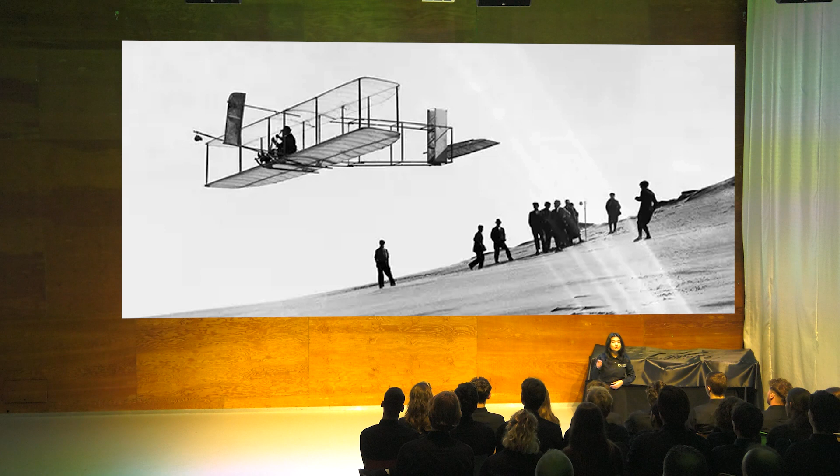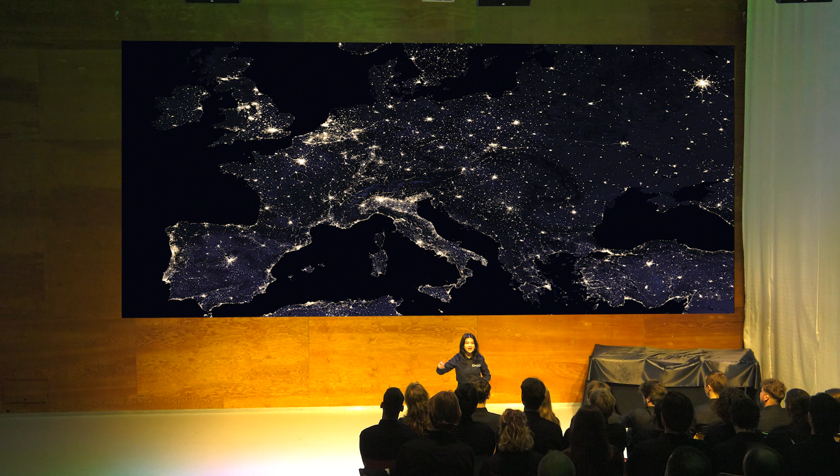Traveling by airplane connected people and cultures across the globe. And today, air travel is the most commonly used mode of transportation for long-distance traveling. Back then, these ideas might have seemed crazy or even impossible because they challenged the world that people were used to. But it was these unconventional and radical innovations that made it possible for us to connect the world, to bring distant cultures together, and to expose us to new ideas and new understandings. Every technological innovation powered a next great leap and shaped the society that we know today. Because after many decades, we still use these modes of transportation.

Let me take you on a journey of what traveling looks like today. So recently, I've been looking into going on a nice city trip in Europe for the summer. Just a short and relaxing breakaway after a year long of hard work at Delft Hyperloop. And I thought about going to Milan, one of the most beautiful cities in Europe. And I was facing a dilemma. It is a dilemma you may recognize. We want to travel, explore, and connect, and we want to do this in a fast and comfortable way. But with climate change being one of the biggest challenges that we as humankind have faced yet, we want to do this in a sustainable way.

And traveling by train is the most environmentally friendly for my trip to Milan. But door to door, this will take me around 16 hours and 4 to 5 transfers on the way. That doesn't really tick the fast and comfortable box. So I started looking into flying. And this would only take me 1 hour and 40 minutes. Seems attractive, right? But with all the time that I will need to go to the airport, wait for my flight to take off, and then go from the airport of Milan to the city center, this trip would still take me around 5 hours. And then, I haven't even mentioned the amount of energy that this flight would consume, which is more than 13 times as much as traveling by train.

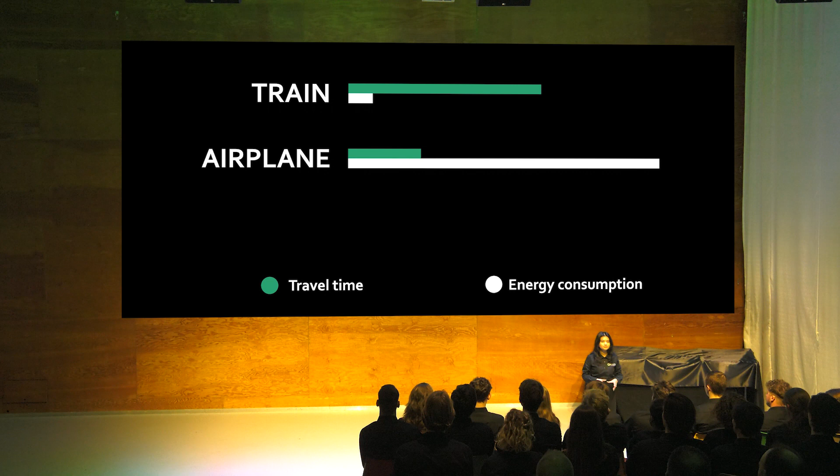Quite a dilemma. There seems to be no ideal way for us to travel. So, once again, we've come to a point where we're asking ourselves a question. And it's that same age-old question that people have been asking themselves for centuries. But with the transportation sector being one of the biggest contributors to climate change, we've added a new challenge to the equation. The question we're asking ourselves now is, how can we travel a longer distance in a shorter amount of time in a sustainable way?

We at Delft Hyperloop have the solution for you. And just like the train, the boat, and the airplane, this idea may sound unconventional, radical, or even crazy. Because yet again, we are challenging the world that you are used to today. But with the current challenges that we as a society are facing, we now, more than ever, need to explore these ideas that might seem unconventional, radical, or even crazy. And Hyperloop is such an idea.

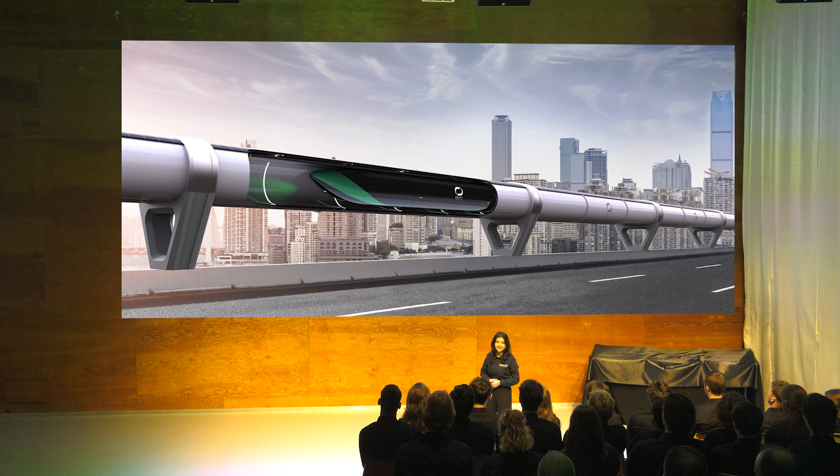It is a solution, a new mode of transportation that can reach speeds of 1,000 kilometers an hour in a highly energy efficient way. But how does it work? And why is it so hard for the current modes of transportation to reach such high speeds? First of all, this has to do with air drag. Air drag increases not only linearly, but quadratically, meaning that if you want to double the speed of a current mode of transportation, such as a car, you will need 4 times as much energy.

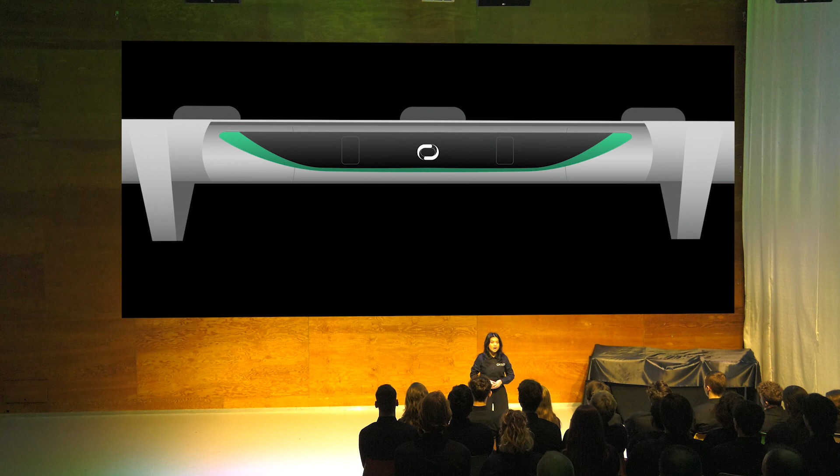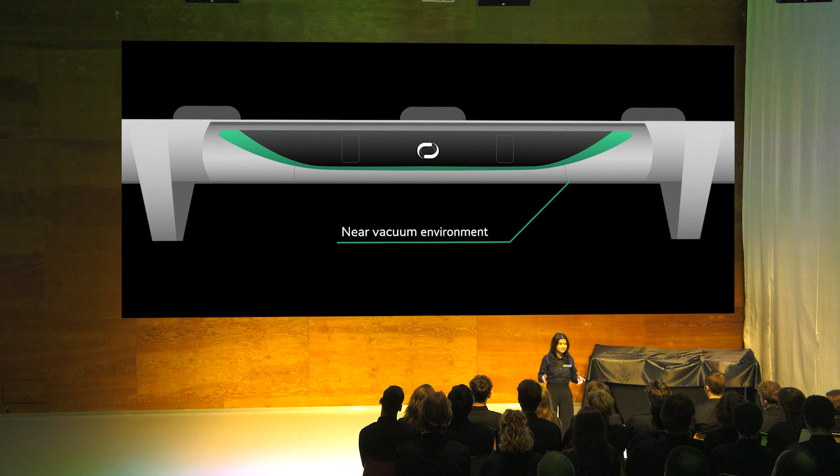What a Hyperloop does is it limits this factor by moving the pod, we call the vehicle a pod, through a tube in which there is a near vacuum environment. This makes the pod encounter very little air drag. The second major limiting factor that the current modes of transportation encounter is rolling resistance. And rolling resistance also increases with speed, making, for example, the wheels of a current mode of transportation very inefficient at higher speeds.

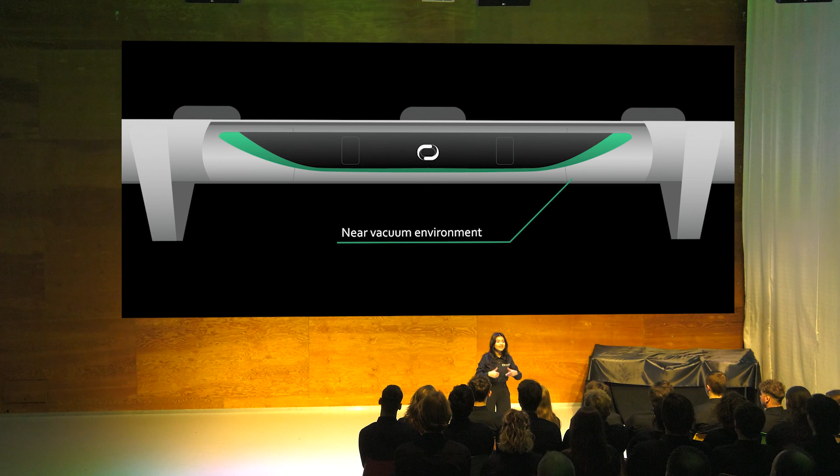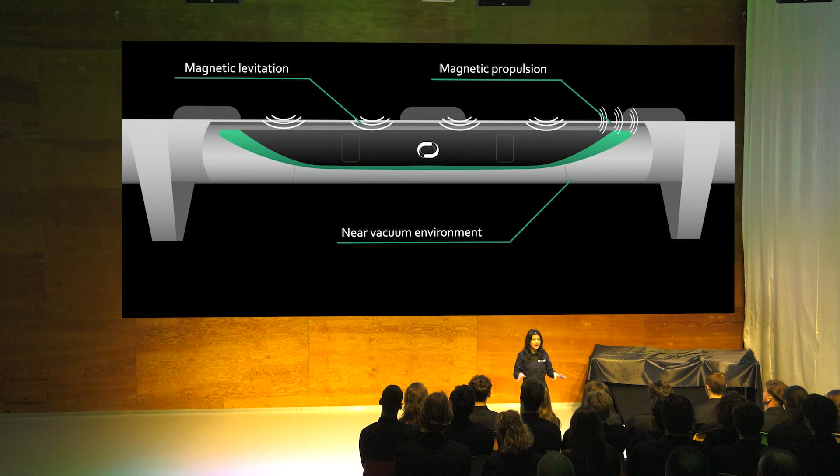Hyperloop eliminates this problem by using electromagnetic forces to levitate the pod, making it not touch the tube at all. To move forward, a Hyperloop also makes use of magnets, which provide a contactless magnetic propulsion. By limiting the drag and friction, a Hyperloop can reach speeds that come close to the speed of sound, using only very little energy. Every couple of minutes, a Hyperloop pod will move from one heart of a city to another, providing a solution to long and uncomfortable travel hours and enabling the energy transition. This completely revolutionizes mobility as we know it today.

So let's put this new mode of transportation into perspective and see how traveling with a Hyperloop would work out for my journey to Milan. First, we go to a centrally located Hyperloop station, say here at Rotterdam Central. There, we board a Hyperloop to Milan, and in less than 1 hour, we arrive at station Milano Centrale, right in the city center of Milan. A journey that is around 3 times as fast as the current journey with the current fastest mode of transportation, and uses about the same energy as a train.

Instead of making concessions between speed or energy consumption, a Hyperloop provides us with a solution. It allows us to travel, explore, and be more connected than ever. And it makes all of this possible in a fast, comfortable, and sustainable way.

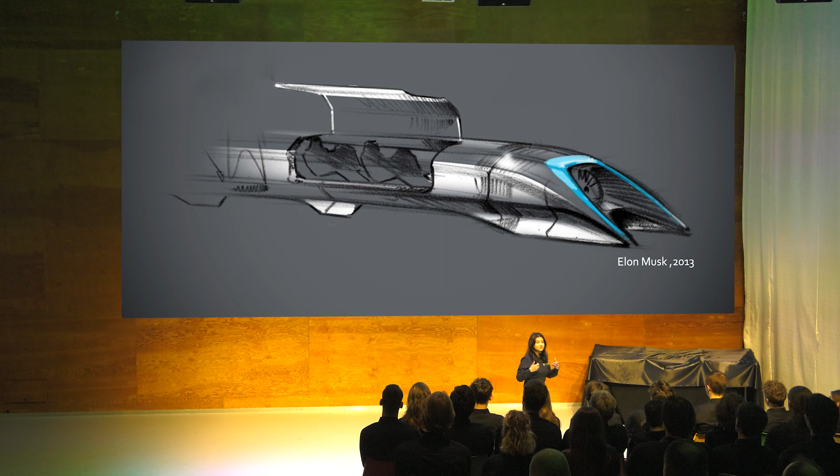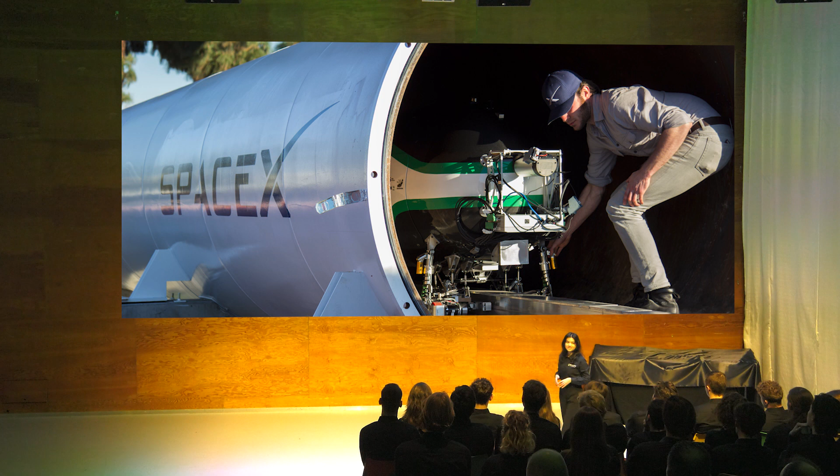But how did this futuristic concept come to life in Delft? In 2013, Elon Musk gave an impulse to the realization of Hyperloop when he wrote a white paper about it. Shortly after, he announced the Hyperloop SpaceX competition in Los Angeles. And this inspired a group of TU Delft students. And of course, they wanted to be part of this challenge and compete in this new competition with a new concept. They recruited more talented, motivated, and ambitious students and became a team. Delft Hyperloop was born.

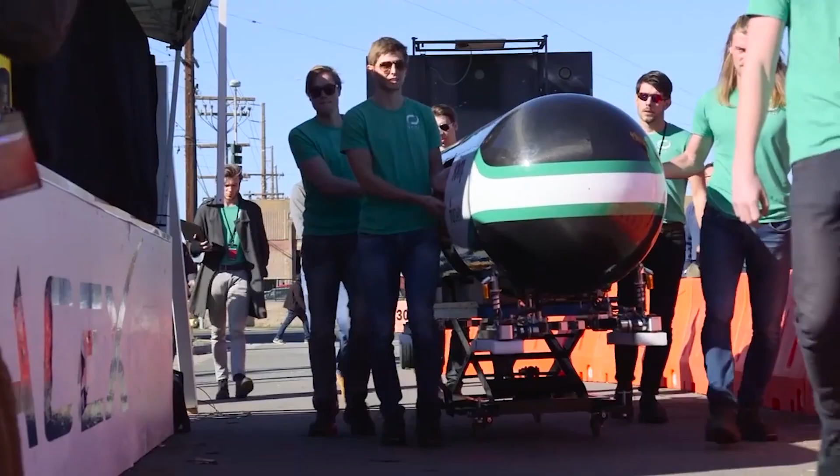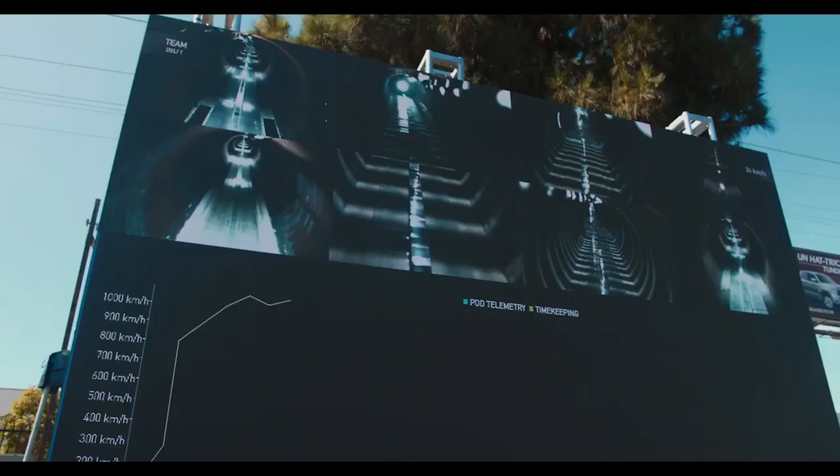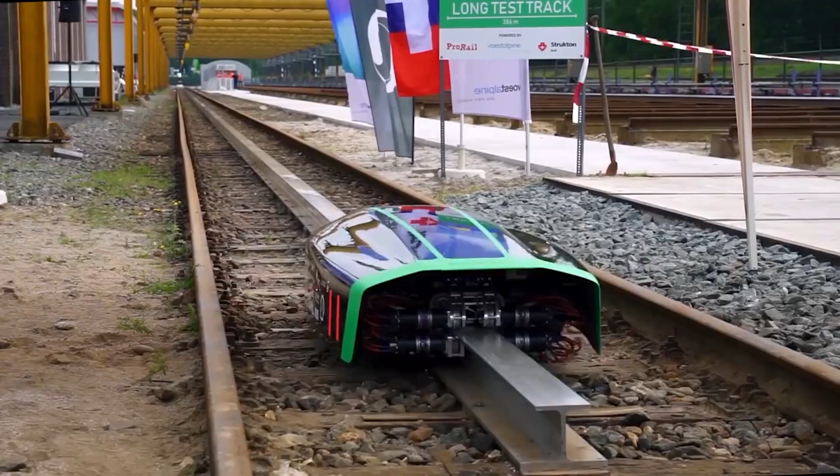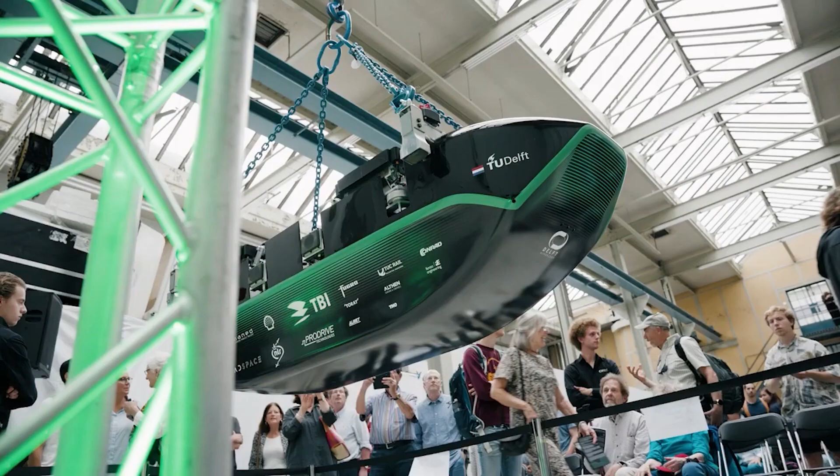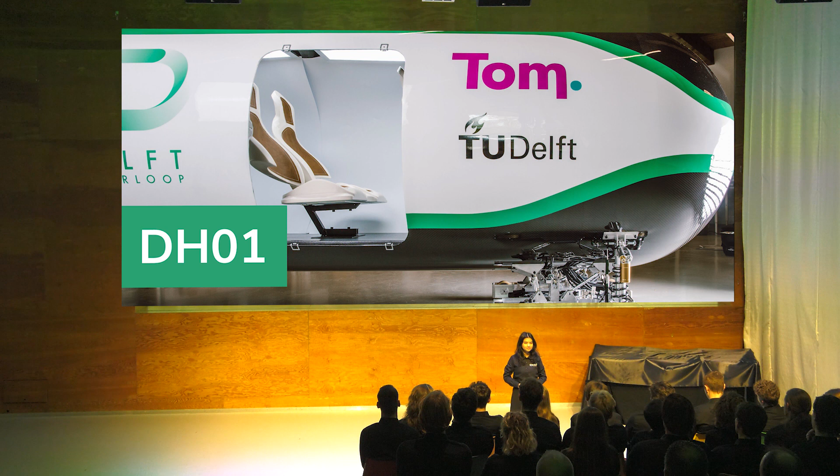A history full of incredible achievements, of which we, as Delft Hyperloop, are all so proud. Delft Hyperloop 1 competed against over 200 student teams and took home the very first prize at the very first edition of the Hyperloop SpaceX competition, putting Delft Hyperloop on the map worldwide. The next years, Delft Hyperloop 2 and Delft Hyperloop 3 also competed at the Hyperloop SpaceX competition, which shifted its focus towards speed.

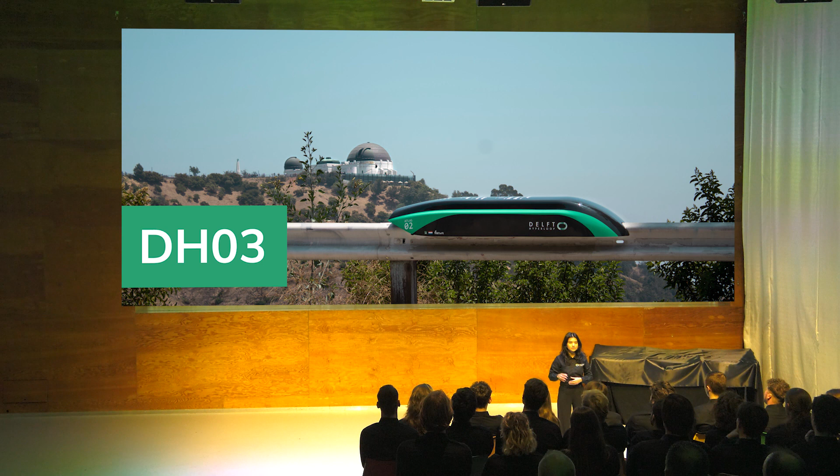However, for Delft Hyperloop 4, there was no SpaceX competition. So this team decided to take matters into their own hands, and they went for a record attempt. With their pod, they were able to reach an incredible speed of 366 kilometers an hour. Delft Hyperloop 5 was the first team to compete at a new and totally different competition, the European Hyperloop Week. This competition challenges student teams to not only build a Hyperloop prototype that works on a small scale, but to develop the best cutting-edge Hyperloop technology that can be applied to a real-life Hyperloop network. This competition also challenges student teams to research the current and future challenges ahead for the implementation of a Hyperloop infrastructure.

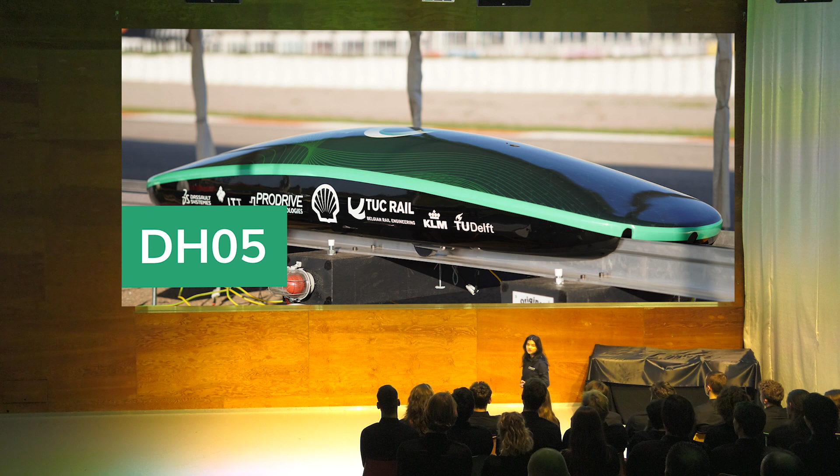Our immediate predecessors, Delft Hyperloop 6, made a major step towards a scalable Hyperloop system with their design, Helios I. For the first time in Delft Hyperloop history, Delft Hyperloop 6 managed to build an active vertical levitating pod. And their design was upside down, which made it more stable and energy efficient. With this hanging system, Helios I stood apart from all other designs at the competition. With Helios I, Delft Hyperloop 6 took the lead and won the Complete Pod Design Award at the European Hyperloop Week of 2022 on home ground.

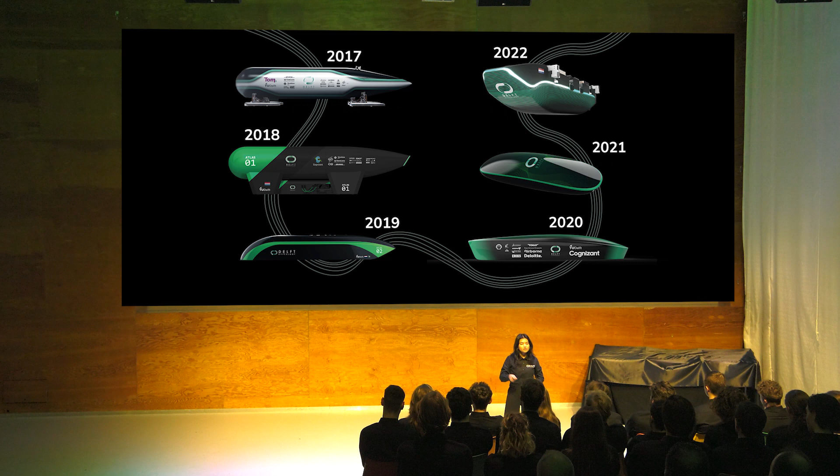A legacy where we at Delft Hyperloop are all so proud of. A legacy we build upon, and one that inspires us to take the next steps. And now, it is time for Delft Hyperloop 7 to accelerate.

And I know that this idea of a levitating capsule traveling through a low-pressure tube might still sound a bit crazy to some of you. And I have to agree. For the realization of such a system, a lot still needs to be done. The boundaries of technology will have to be pushed, and the socio-economic and technical feasibility of such a system will have to be explored. But that is exactly what we do here at Delft Hyperloop.

And for that, you need a team. A team consisting of people crazy enough to explore the potential of this unconventional idea. A team that dares to take on a challenge to design, build, and demonstrate Hyperloop technology in just 1 year. And that is the team that I am so proud to present to you tonight.

Delft Hyperloop 7 consists of a group of people with 10 different nationalities, 13 different study backgrounds, and in total, 41 different personalities. We started off our year as strangers to each other, with our own interests, our own backgrounds, and our own motivations to join this team. Some of us really wanted to put our engineering skills to the test and become a top-notch engineer. Others wanted to develop their soft skills and learn to communicate and work well together in such a big and multidisciplinary team.

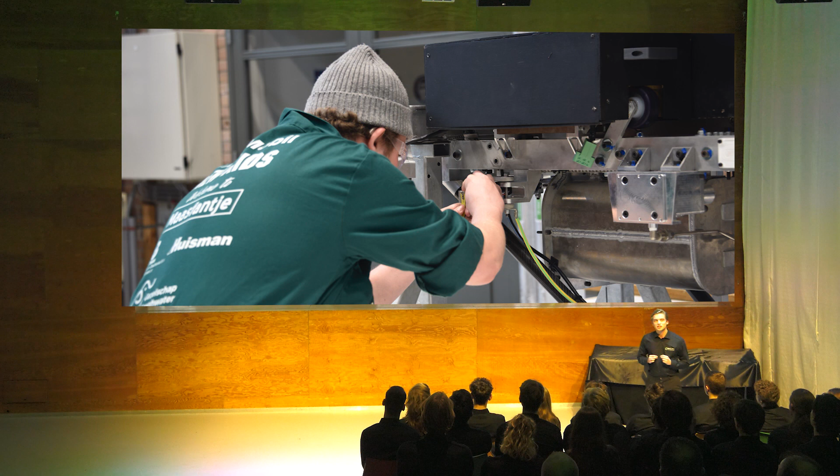And once we're done with production, we move on to testing. And as you maybe can imagine, we start out with testing little things, like whether a part can sustain the loads that it's exposed to, or whether it can operate in a vacuum. But once entire subsystems, like the batteries or the brakes, are fully operational, it's time for the next step, their integration with other subsystems in the pod. At this point, all the different subsystems in the pod come together. The engineers, having spent months on designing, building, and testing their own subsystems, now have to make sure that it works well with other components in the pod.

And this is the riskiest phase. Because if something goes wrong here, we have to restart the design cycle. This means that we have to redesign, then produce, and then test the part before knowing if the replacement does actually work. And this is exactly why it takes professional engineering companies, like car manufacturers, often multiple years to develop a product. Unfortunately, we don't have that kind of time, making it so important that our design is correct the first time around.

If everything works and all subsystems operate seamlessly with each other, we're ready for the competition. To compete in the EHW, we have to ship our pod and about 13 tons of steel for our track to Edinburgh in Scotland. And here we have to rebuild our 50-meter track and align it onto millimeters in time for the competition. And then we have 1 week to prove to the jury of the competition that our pod is the best.

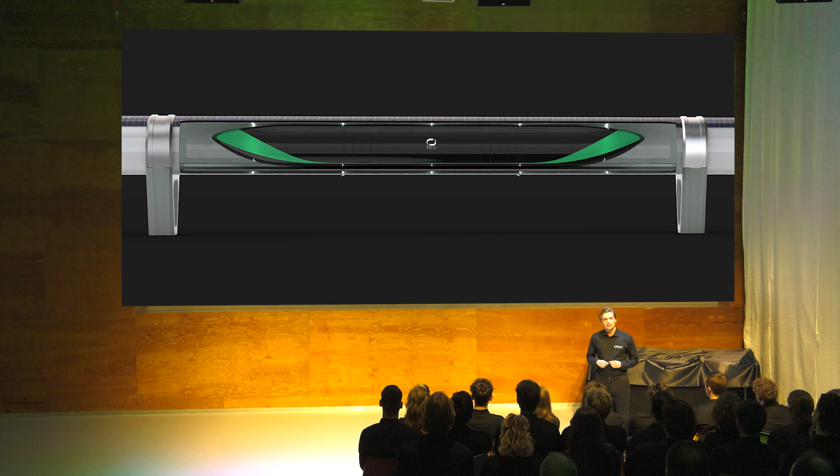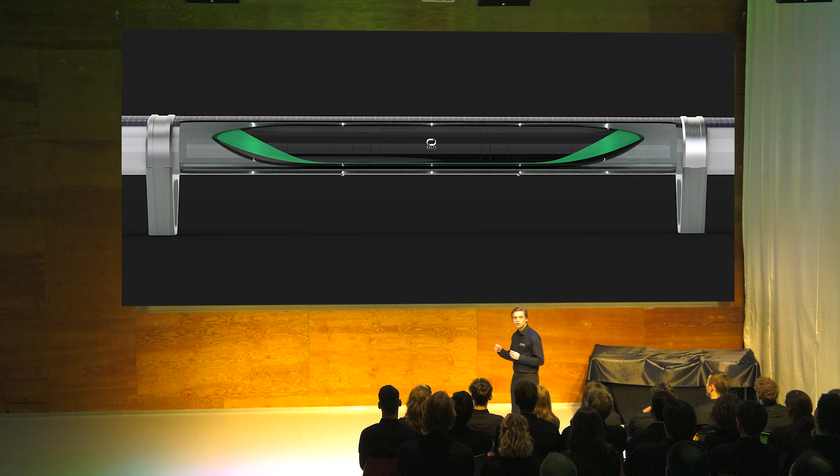So at this point of the year, we knew the steps that we needed to take to get to the EHW, and we had set up the departments within our team to get there. Now, it was time to start working on a conceptual design. As you can imagine, there are many possible design configurations for a Hyperloop pod. And because Hyperloop is a relatively new concept, there is no consensus between student teams or companies on which design is optimal. To create a conceptual design, we had to devise a vision of what a future Hyperloop system would look like and how we as Delft Hyperloop can lead the way in realizing this future. And we decided on 3 major improvements.

The first step Delft Hyperloop is taking this year is that of full levitation. As Umika explained earlier, levitation eliminates friction, allowing for more efficient guidance over the track. Last year, they took the large step of starting to vertically levitate over the track. However, their pod still made use of wheels to guide the pod on the sides. This year, we continue the development of the levitation system by adding lateral modules. These lateral modules use active magnets to guide the pod on the sides. Together with the vertical system, it makes sure that our pod does not make any contact with the track during operation.

And then secondly, we decided to develop a new kind of motor. To understand this decision, you have to know what type of motor our predecessors made. They implemented a linear synchronous motor. This motor makes use of coils installed over the entire length of the track. By letting current run through these coils, a magnetic field is created, propelling the pod forwards over the track. You can compare this type of motor to a conveyor belt, transporting passive elements over a motorized track. And this makes the pod itself lighter and simpler, compared to a design where the motor is within the pod.

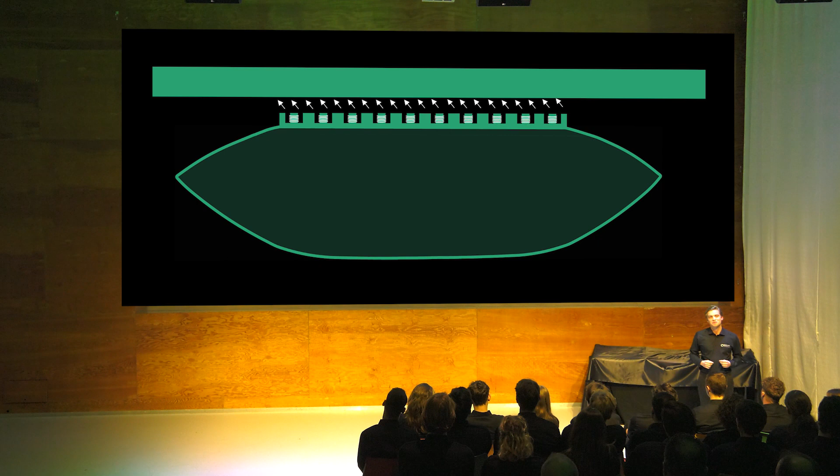We decided to develop a new kind of on-pod motor. This is truly a one-of-a-kind motor, having never been built anywhere in the world at the scale that we do so. It allows us to reach extremely high efficiencies. And because it sits inside the pod instead of inside the track, it greatly reduces the cost and environmental impact of our infrastructure.

We closed off conceptual design, deciding that levitation and propulsion would be the 2 areas that we would improve on the most this year. And we moved from conceptual design to detailed design, fully working out all design elements of our pod. But during a Hyperloop year, many challenges come up that you didn't plan for originally. And these challenges force the team to remain flexible, as delays are not an option.

And one of these challenges was that of heat generation. You see, the components critical for the motor that we moved from the track to inside the pod cannot operate in a vacuum. And because our pod is supposed to travel through a vacuum tube, this would not work for us. And to fix this, our engineers placed these components in an air-sealed compartment, what we call a vacuum box, where atmospheric pressure is maintained, even though our pod is in a vacuum.

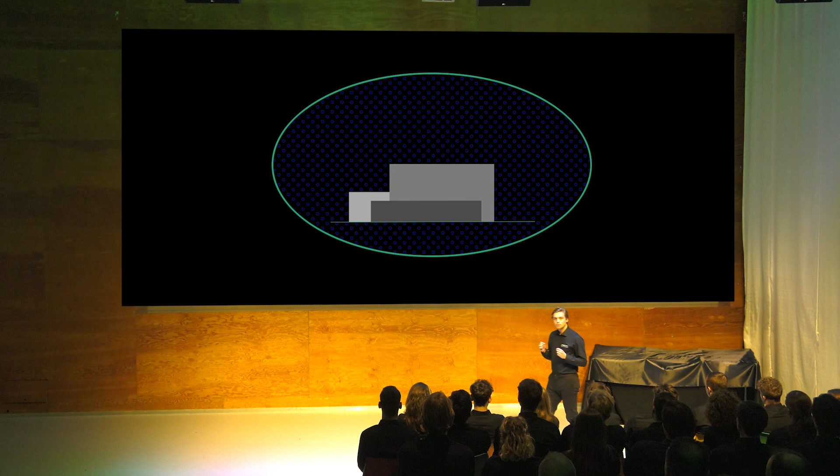Very late in the design process, however, we found out that these components, critical for the motor, generated a lot of heat. And because they're stored in a sealed compartment, there's nowhere for this heat to go. Unlike a car or computer, we do not have the option to dissipate this heat away to surrounding air, because our pod is in a vacuum. And radiating the heat away is also not an option, because the surface area of our pod is not large enough for this.

So at this point of the design process, we hit a dead end. And we had two options. The first was to remove the vacuum box altogether and let outside air cool these critical motor components. However, this would lead to our pod not being vacuum compatible anymore, which is an essential part of a Hyperloop system. The second option we had was to do anything we could to develop a vacuum-compatible thermal management system. But this would be very risky, as we were already nearing the end of the design phase, and we did not know whether such a system would even be possible.

But the team came together and chose the second option, to try anything they could to solve the heat generation problem. And this would mean that our year would be even harder. But the team decided that if everyone put their shoulders in, we would be able to solve it. We formed an 8th department, the thermal management department, consisting of these 3 people. They left their old department to start working on a challenge which has not been solved before in our history. And I'm happy to say that they found a solution.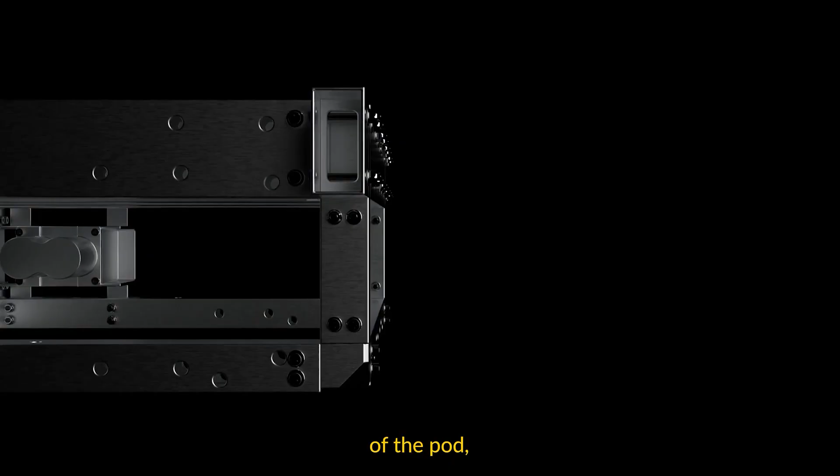I believe that the world is ready for a fast and greener mode of transportation. By solving unexplored challenges, I want to bring the full-scale Hyperloop system closer to becoming a reality. This year, I want to convince as many people as possible about the Hyperloop technology to create awareness for the transportation method of the future. By creating the foundation of the pod, I contribute to a safe and functional Hyperloop that can perform at incredible speeds, allowing me to push the boundaries of technology.

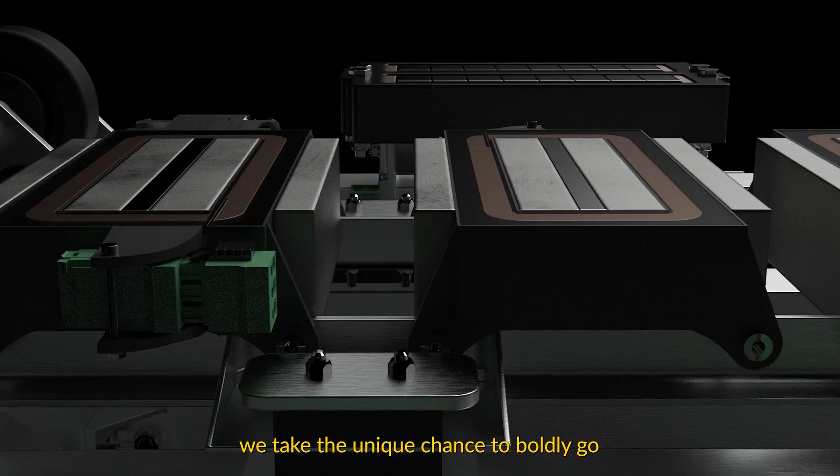The challenge of realizing full magnetic levitation is a crucial element of the Hyperloop system, so I'm happy to be part of Delft Hyperloop to work on this. Linear magnetic propulsion is still on unexplored grounds. This year we take the unique chance to boldly go where no one has ever gone before. I want to test myself as an engineer by creating a thermal management system in a vacuum environment, which is one of the Hyperloop's largest technological challenges.

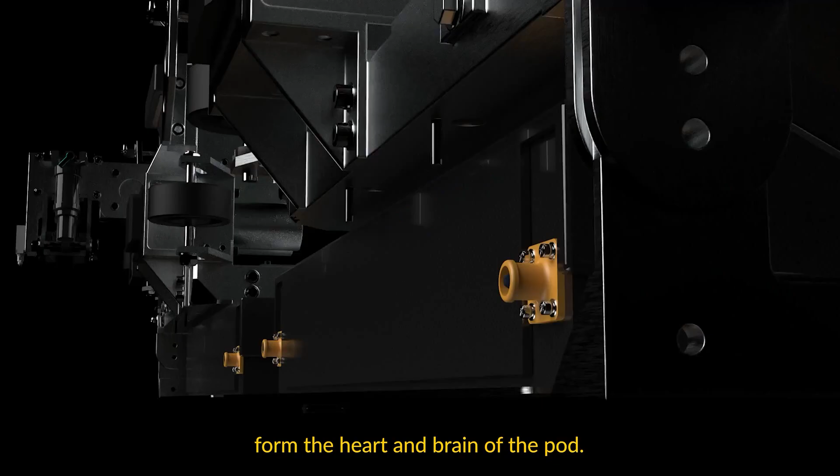The sense and control systems form the heart and brain of the pod. It thrills me that advances made here will trickle down to all other systems and allow them to perform at their best. The world is ready for change, and Delft Hyperloop is ready to take on the challenge to sustainably revolutionize the way we move. Now is the time to accelerate. We are Delft Hyperloop 7. And this is Helios II.

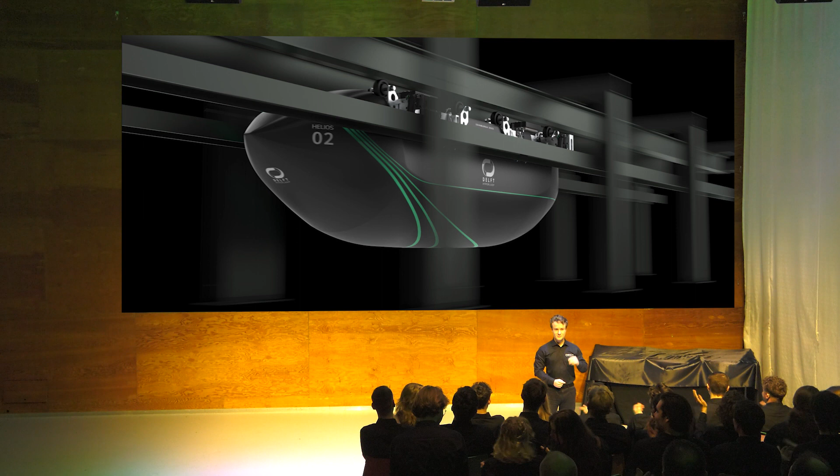Incredible. I think I'm not the only one that gets goosebumps when looking at this design. Every time I see it, it makes me extremely proud of what this team has achieved so far. My name is Guillermo Van, and I'm the chief engineer of this year's Delft Hyperloop team. As the chief engineer, it is my responsibility that all systems work perfectly together, resulting in an optimal performance at the European Hyperloop Week in Edinburgh. Tonight, it is my honor to take you on a journey through the Hyperloop system that we have worked so hard on for the past 6 months.

But before we dive into the technical details, I would like to show you something that can be seen back in every part of our design: the design values. Here at Delft Hyperloop, we have 3 design values, and together they form the foundations on which we measure the quality of our engineering. Every day, we ask ourselves the same question over and over again. Can we apply what we have designed to a large-scale Hyperloop network? That is why scalability is one of our most important design values. This is how we came to the decision to drastically change last year's propulsion system by building an onboard motor that keeps the infrastructure as simple as possible.

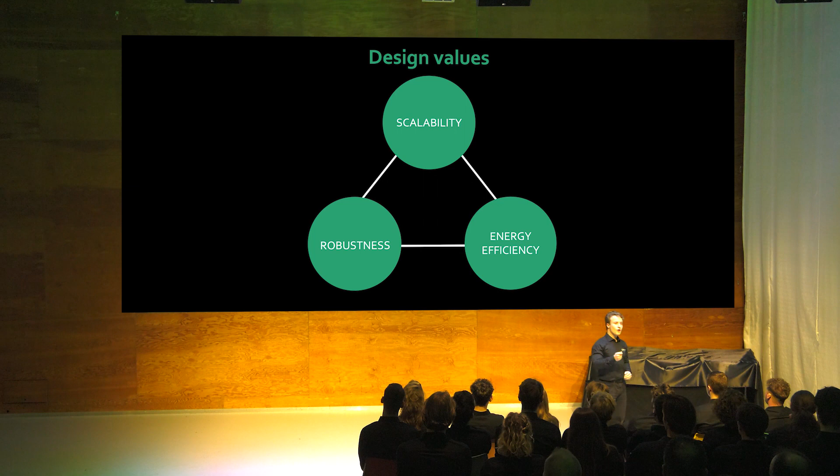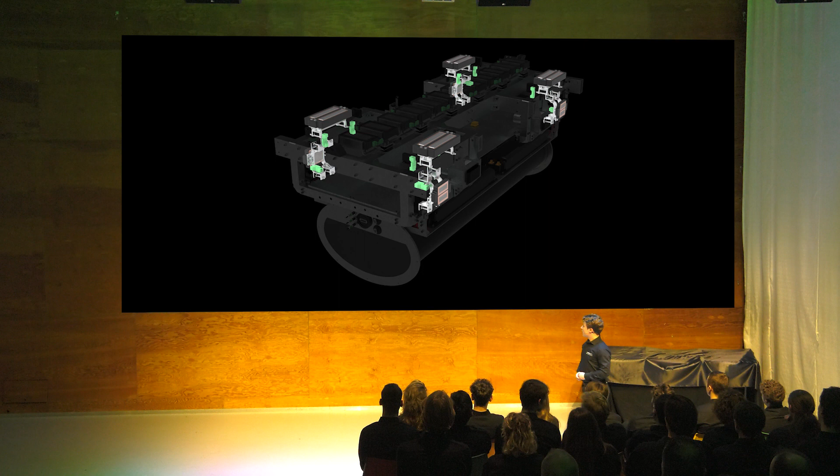Let's now take a closer look into every single subsystem of our design. We will start with the levitation system. This year, we have set the ambitious goal of full levitation. It means that we do not want to touch any part of the track at all times. The levitation system does this by magnetically suspending the vertical motion as well as the lateral motion of the pod. But how do we do this, and what makes it so difficult? In order for us to design the levitation system, it is crucial to first know the configuration of the pod with respect to the track.

It has been decided to build further on last year's configuration, where the pod is riding under the track instead of above it, like a conventional train. This results in an inherently stable system where a small disturbance on the pod will result in it wanting to balance back to its original position. So, now that we know that the pod is under the track, let's take a closer look at one of our vertical levitation modules. This is called a hybrid electromagnetic suspension module, or HEMS module, due to its hybrid use of permanent and active magnets. The permanent magnets are placed on a so-called iron U-core that is able to guide the magnetic field lines very efficiently.

Because the track above it is made out of ferromagnetic steel, the modules attract themselves upwards to the track. We're now sticking to the track, but we want to levitate. So how do we get off it again? We do this by placing coils around the poles of the permanent magnets. By letting a current flow through these coils, an active magnetic field that opposes that of the permanent magnet is created. This way, we're getting off the track again.

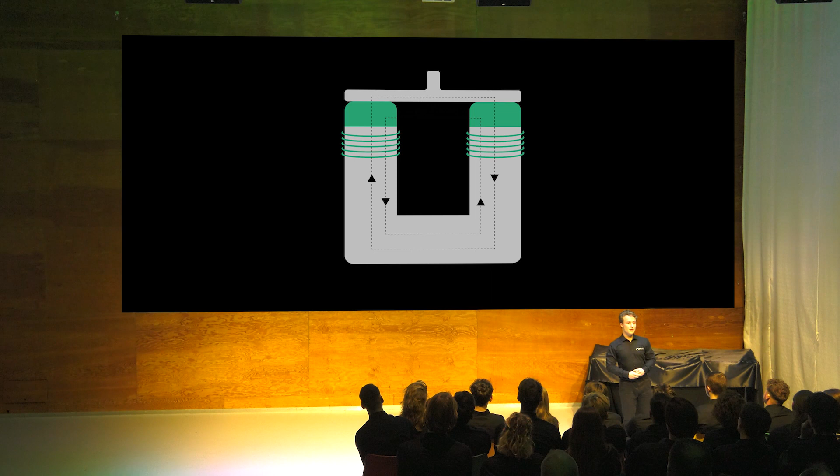By measuring the distance to the track and changing the flow of the current 6,000 times per second, we're able to keep the entire pod level midair. 4 of these vertical levitation modules are placed on top of the pod, and together they're able to carry the entire weight of the pod. But we're not there yet. We also want to make sure that the pod does not touch the track in the lateral direction.

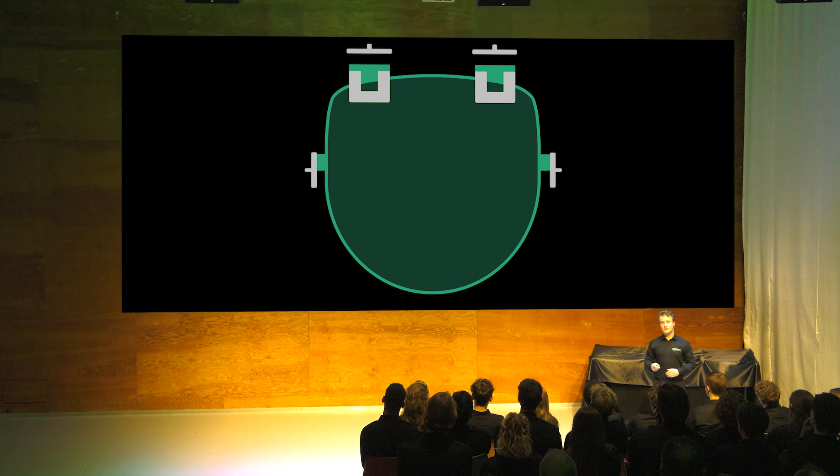So for this, an electromagnetic suspension module, or EMS module, is developed. Unlike the HEMS modules, the EMS modules only contain active magnets. This means that the magnets will only attract themselves towards the track when they're turned on. But how do we control this lateral suspension using these modules?

Well, there are 2 ways you can go in the lateral direction, either to the left or to the right. When the distance from the pod to the track on one side gets too small, the opposing EMS module will become active. This way, the pod will balance back to its original position without touching any part of the track. 4 of these EMS modules are placed on the side of the pod in order to constrain all possible rotations.

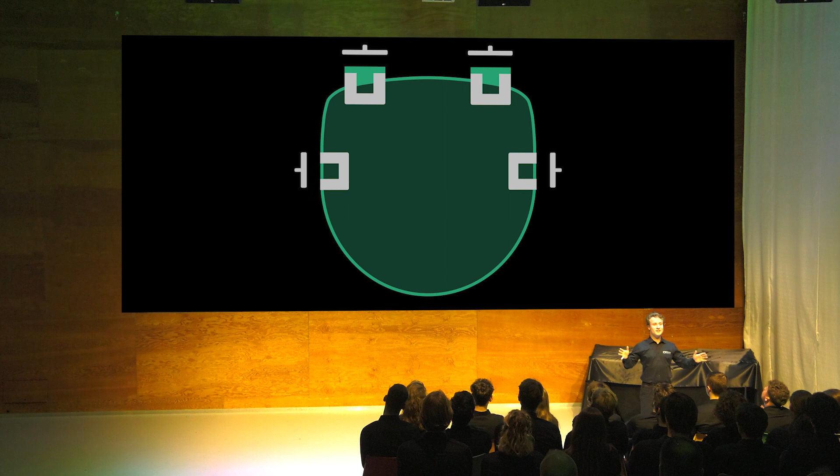We are now fully levitating, and we have full control over the entire orientation of the pod. A crucial step towards a complete Hyperloop system. But we're not there yet. We do not only want to levitate. We also want to find a fast and efficient way of accelerating our pod to its top speed. Since we're not touching any part of the track, we cannot do this by driving the wheels, like on a car or a conventional train. So for this, we use a so-called linear magnetic motor.

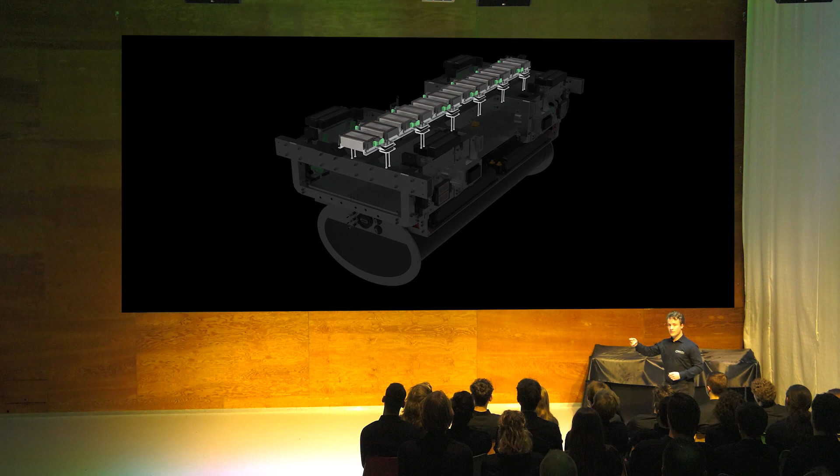The propulsion department is responsible for developing this motor to propel our pod forward, backwards, and brake regeneratively only using magnetic force. There are many linear motors to consider, but after weeks of research and extensive analysis, we found the optimal motor for our design. We chose the linear flux switching permanent magnet motor. What a mouthful.

This motor showed a very promising performance on paper, but it was still a huge risk that we took. That is because we're dealing with a motor that has never been built before anywhere in the world at this scale. Anywhere in the world at this scale. So, how does this motor work? And why is it worth the risk?

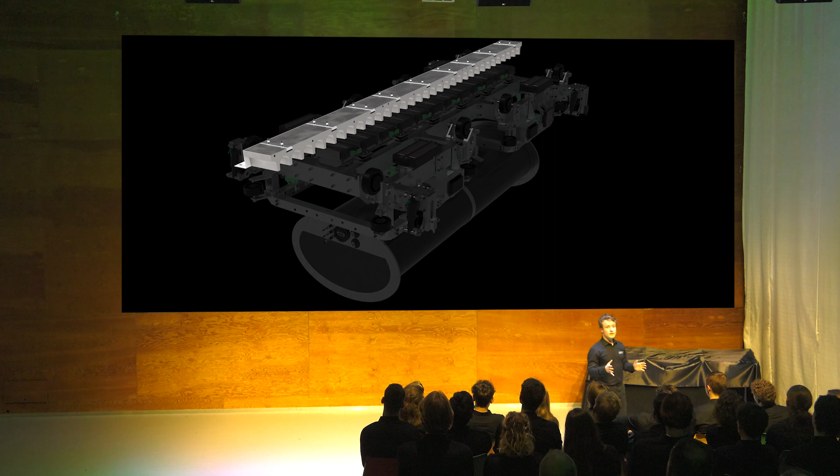Well, the motor consists of 2 parts. One part is mounted on the track and is called the stator, and the other part is mounted on the pod and is called the mover. The steel stator hangs over the entire 50 meters of the track and weighs about 3 tons, about the same weight as a white rhinoceros. 700 steel teeth stick out of this stator, and they're all aligned within a 2 mm accuracy. You can only imagine the amount of precision that is required when producing and assembling this system.

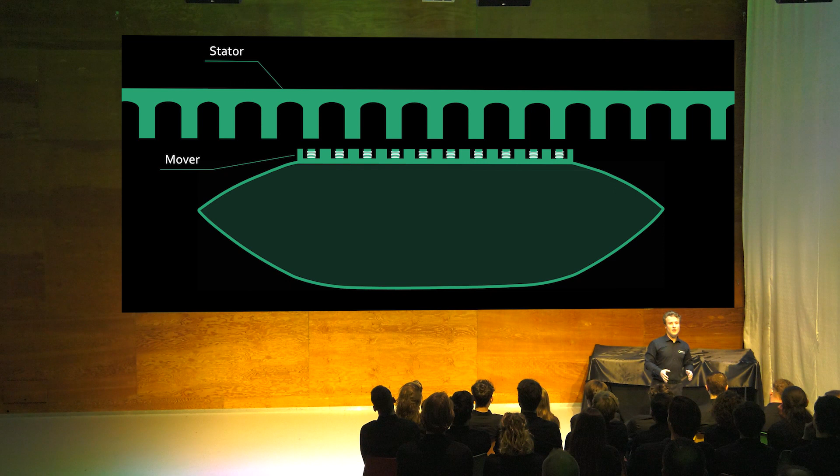And then we have the mover. This is the place where all the magic happens. Just like the levitation system, also the mover consists of permanent and active magnets. These magnets attract themselves towards the steel stator, but this attraction is controlled in a very clever and precise way.

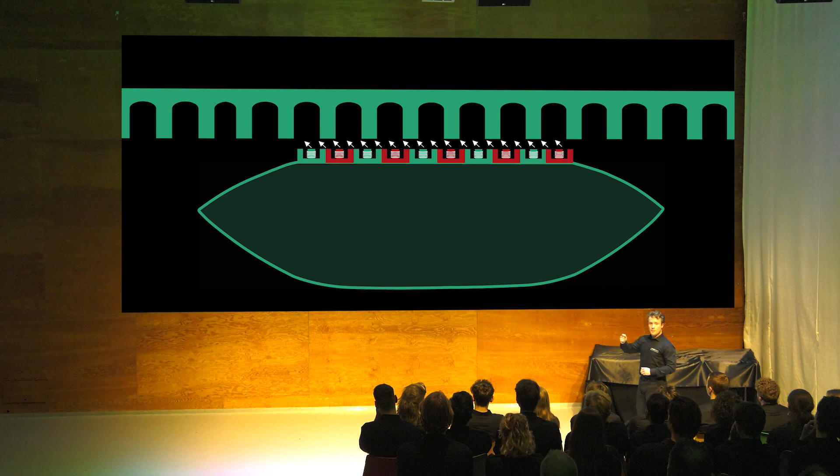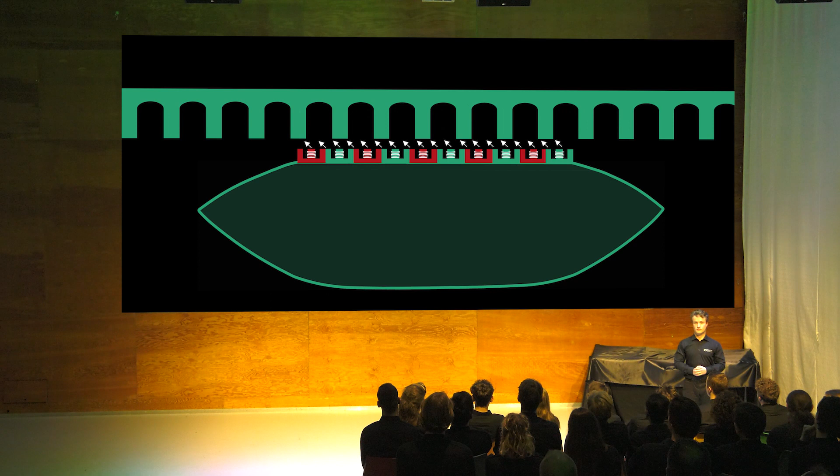When one of the magnets of the mover arrives at the tooth of the stator, it will be turned off. It is exactly this moment when another magnet that is not under the tooth of the stator will be turned on. This way, the mover snaps towards that next tooth. By repeating this cycle over and over again, we're able to create a forward motion. We have now full control over the motion of the pod without touching any part of the track. A difficult idea that we had to figure out from scratch.

Such a complex motor has many parameters to consider. But after months of research, back-of-the-envelope calculations and simulations, the optimal combination of all these parameters was found. We managed to make a motor that has a top speed of over 10 meters per second while having an energy efficiency of over 93%. An incredible achievement at the very end of the design phase.

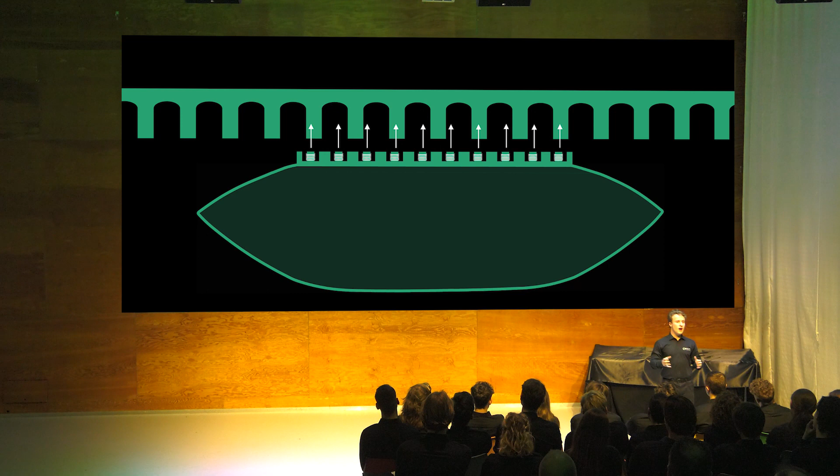One last thing about our motor. Not only does it generate a force forward, but it also lifts the pod upwards. In fact, this lifting force is so high that it can carry about 40% of the entire weight of the pod. This means that the propulsion system actually helps the levitation system in carrying the pod. This integration between these two critical subsystems is something that has never been done before in the history of Delft Hyperloop, and that is at the frontier of cutting-edge Hyperloop technology.

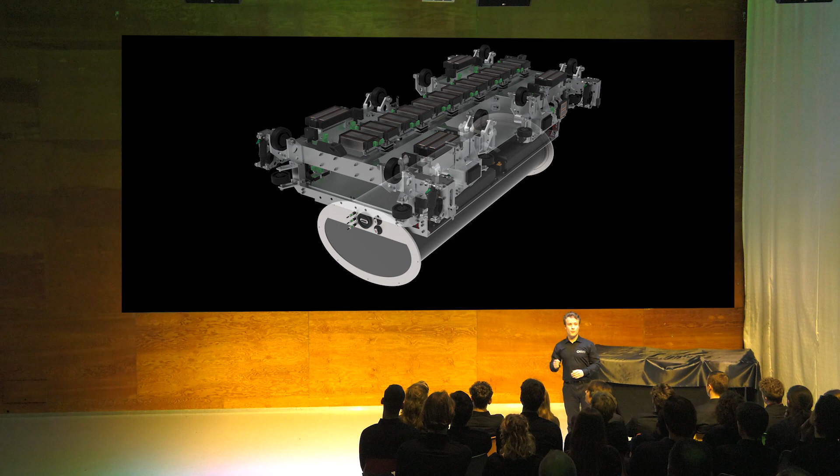As you could imagine, we have a lot of electrical components on board. But unfortunately, a lot of these are not compatible with the near vacuum environment that our pod should be able to operate in. That is why they're kept safe in a so-called vacuum box, where the pressure is kept at atmospheric conditions. This vacuum box consists of a carbon fiber shell that is capable of bearing the loads of a pressure difference while being as light as possible. It is a prototype of what one day will be the capsule that could carry passengers to their destination.

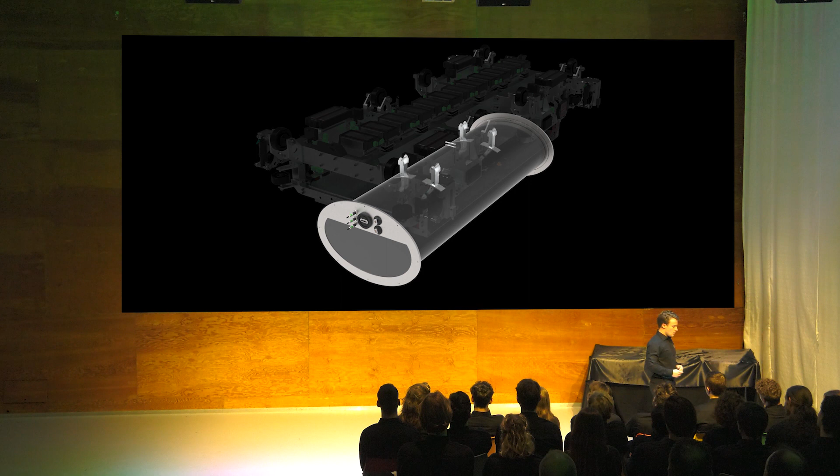When designing the vacuum box, we stumbled upon a problem. As Pepijn mentioned before, the motor drives that are kept in it generated too much heat during the run. In fact, one of the motor drives had a power loss of almost 700 watts. That is about the same heat that comes from a terrace heater. So when we saw these numbers, we became, of course, very worried. But the thermal department quickly came to a scalable and robust solution. They decided to build a so-called heat battery, where all the heat could be stored, taking it away from critical components.

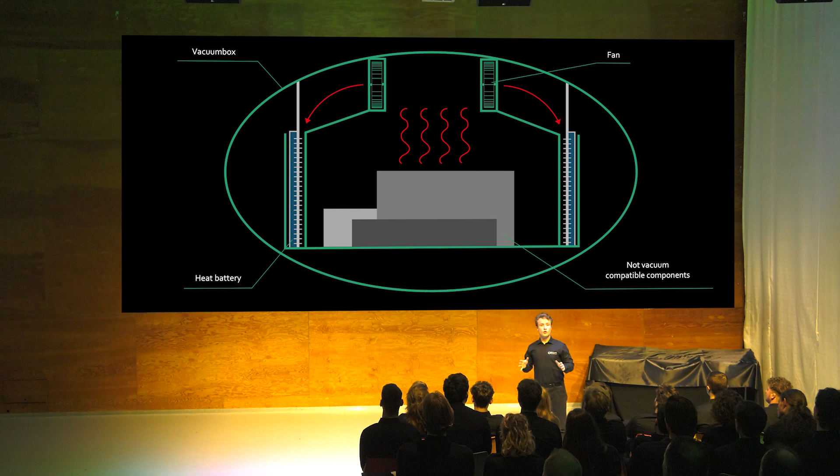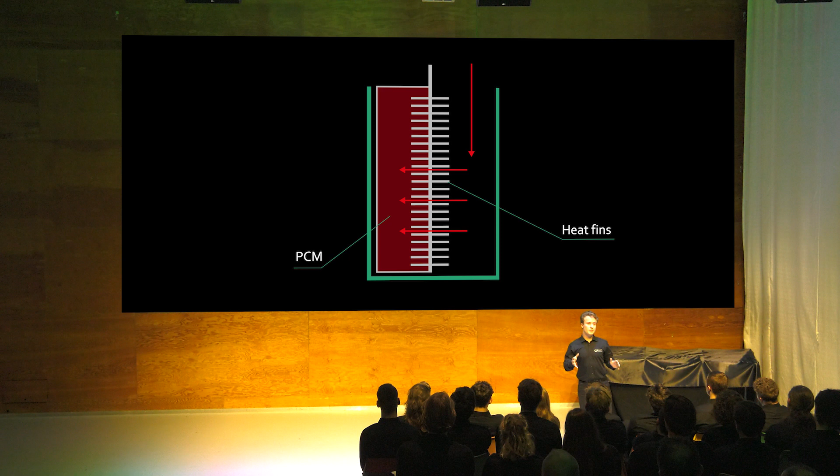Let's take a closer look into how this is done. First, the heat from the motor drives will be blown away using fans. When the hot air arrives at the heat battery, aluminum heat fins will guide the heat to the core of the heat battery. Within this core, a phase-changing material, or PCM, is stored. This is a type of wax that melts at a certain temperature, just like the wax from a candle. When this PCM melts, it's able to absorb more and more energy while keeping the temperature constant. This is exactly what needs to happen in the vacuum box in order to keep the temperatures low. A simple solution in order to protect our most complex systems from overheating.

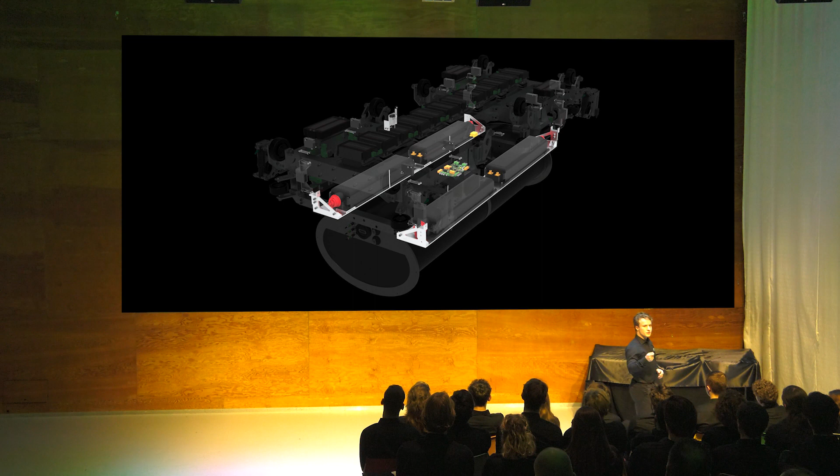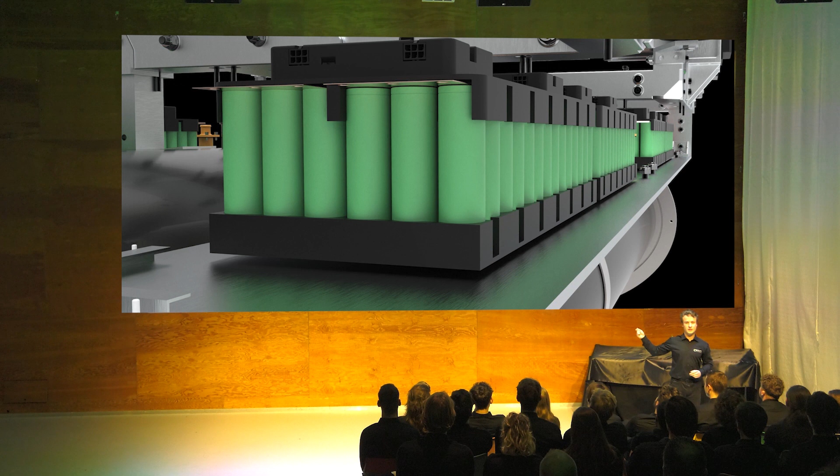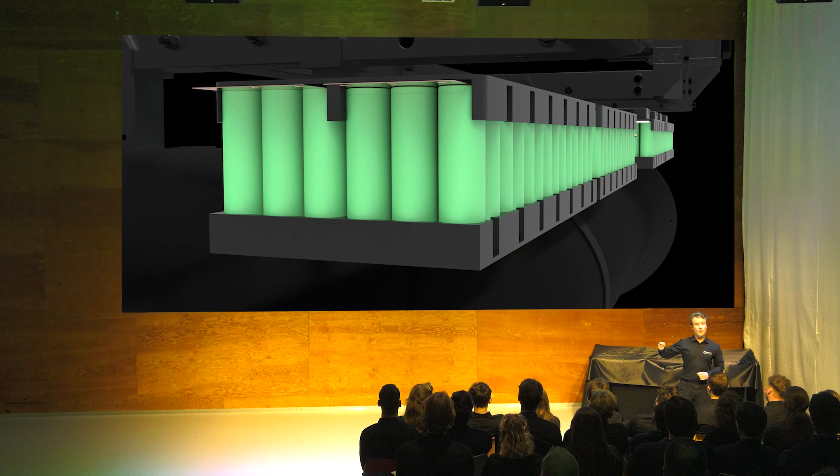We've now come a long way, but we still need all subsystems to communicate with each other and get power. This is done by the sensor control department. They are the brains and heart of the pod. In order for all subsystems to get power, a battery consisting of 672 vacuum-compatible lithium-ion cells is installed on the pod. In order to size this battery, we had to know two things. First, the amount of energy that needs to be stored in these batteries. With about 7 kilowatt hours of energy, our batteries will be able to perform the intended runs at least 3 times, ensuring the robustness of our system. Secondly, we needed to know the power, or energy per second, that our batteries should be able to deliver. With a stunning 82 kilowatts of peak power, our batteries will be able to accelerate the pod to its top speed while levitating.

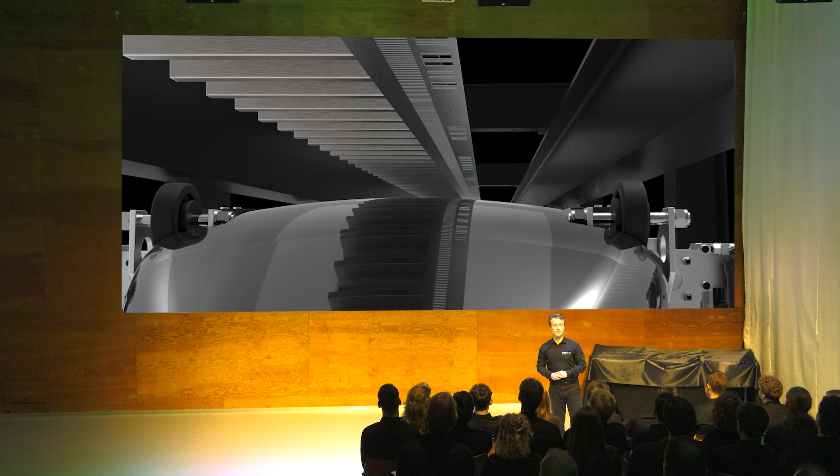The eyes and ears of the pod consist of various sensors that are placed strategically. The most important one of these is the localization system. In order for the motor to operate correctly and efficiently, we need to know the exact location of the pod at all times. With the localization system that we have developed, we're able to know the location within a 3mm accuracy. This is done by mounting an encoder strip over the entire length of the track. An onboard laser will read off this encoder strip and count the stripes. This encoder strip will give the pod information about the exact location, speed, and direction of travel.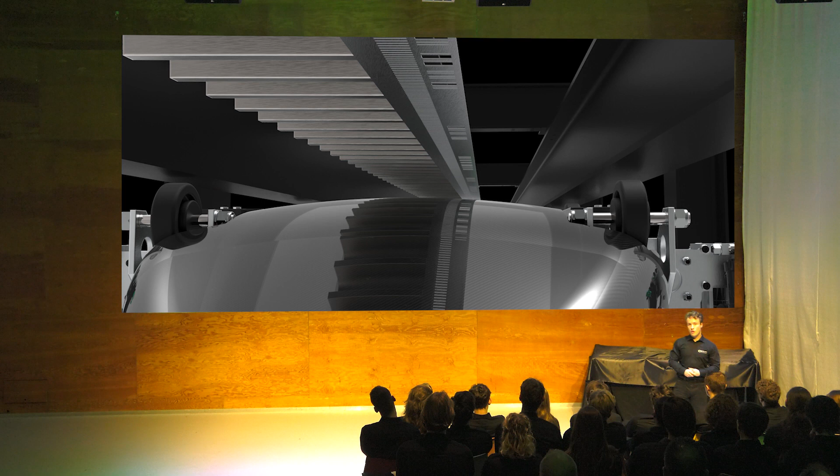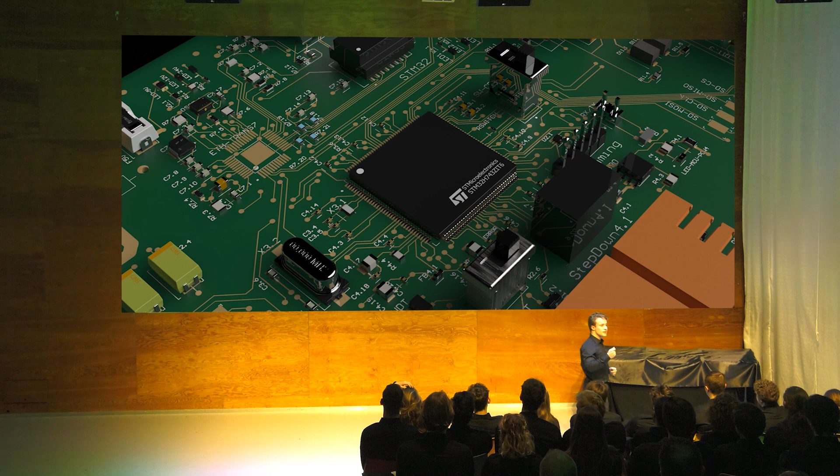Various other sensors that monitor the exact temperature and pressure of subsystems are also installed on the pod. The onboard computer then reads out this data and can take decisions about the actions that need to be taken completely autonomously. This data is then sent over to the ground station, where we can analyze it and learn more about our pod every day.

And we have now arrived at our last subsystem. Now that almost everything is finished, it is time to keep it all together while maintaining structural integrity. This is done by the mechanical department. They are responsible for the track, emergency brakes, aeroshell, and chassis. In order to guide the pod and actually reach high speeds, a long track will be brought to Edinburgh as well.

This track consists of a total of 140 steel I-beams, altogether weighing over 8 tons. This colossal structure will span over a length of 50 meters. And to put that into perspective, that is more or less the length from this stage all the way to the last row and back.

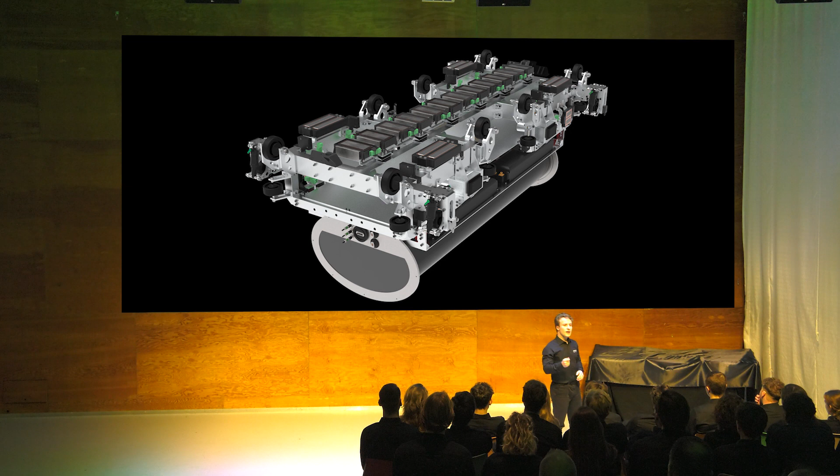So the track is very long, but it's not infinite. So what do we do when we reach the end of the track and suddenly our motor fails? For this, a pneumatic emergency braking system is installed on the pod. This system uses 4 braking calipers that use springs that extend outwards to the track when needed. The generated friction force is then so high that it can bring the entire pod to a standstill within half a second.

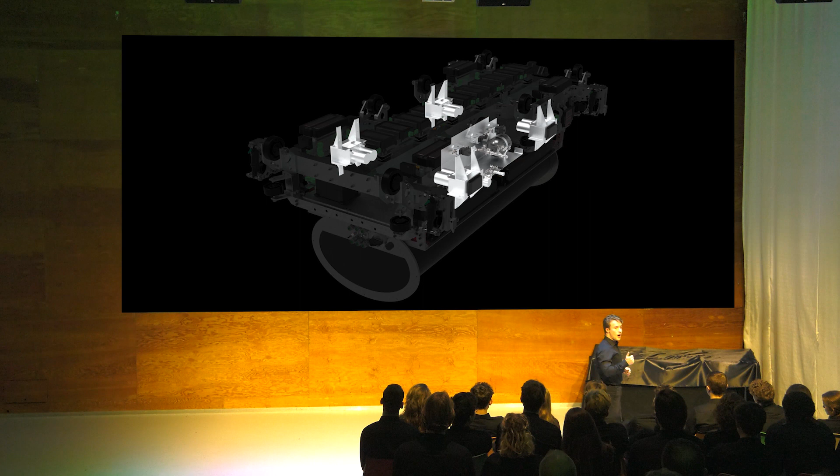On top of that, when the power on the pod is lost, or the pressure in the tank is lost, the brakes will immediately extend outwards to the track. This ensures the safety of our system, even if everything fails.

And then we have the aeroshell. This 3.5 meter long carbon fiber housing is there to protect all of our subsystems while having a shape that is as aerodynamic as possible. Together with the design engineers, the mechanical department found this optimal shape around all of our subsystems.

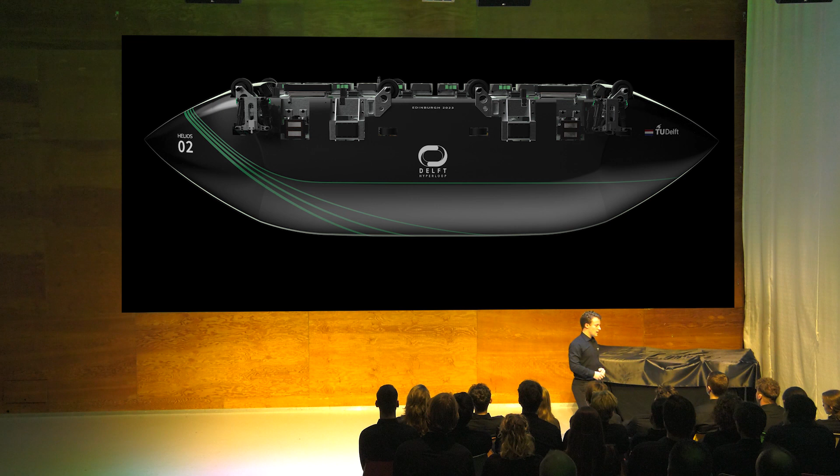And then last but not least is the backbone of our pod, the structure where everything will be mounted on, the chassis. Because everything needs to be on the chassis, it is one of the first things that we have produced so far, and I'm beyond excited to already show you this design in real life.

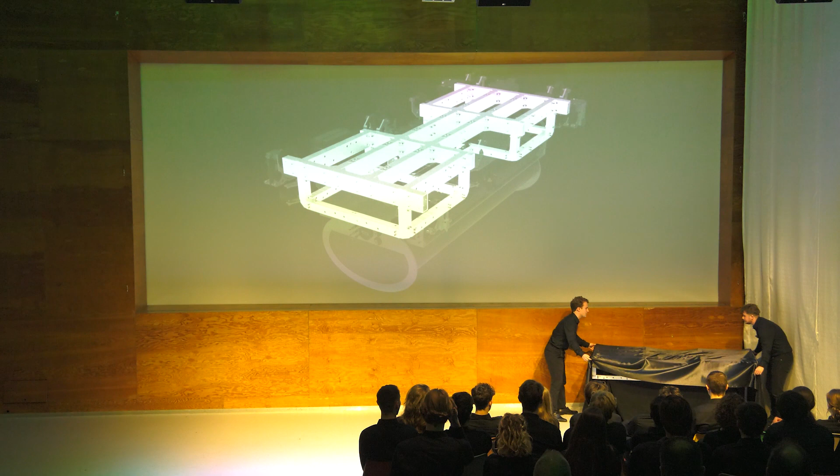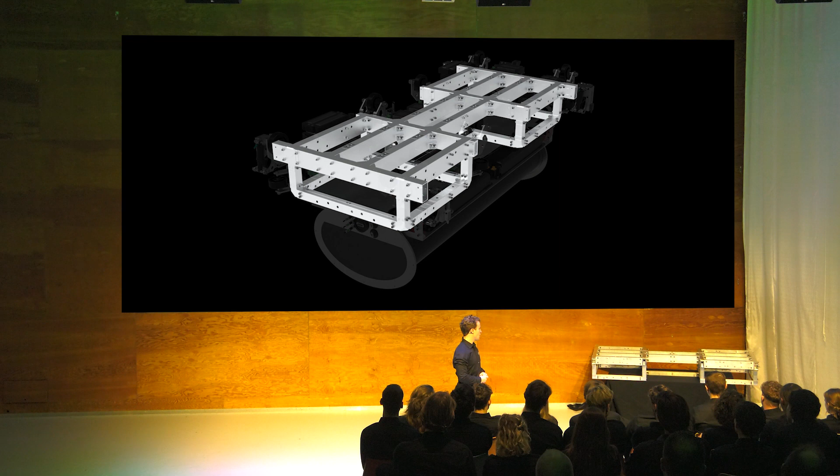After various iterations, this optimal configuration came to life. It is designed to withstand the high loads induced by the propulsion and levitation system, while being as light as possible. It is a double ladder frame consisting of aluminum beams. And as you can see, it is very easy to access every subsystem, making our design easier to operate and thus safer. And with that, our design is finished.

By using revolutionary ideas to come up with innovative, cutting-edge technology, we are accelerating the implementation of the Hyperloop system. A scalable, energy-efficient, and robust product is what we will bring to Edinburgh to win the European Hyperloop Week. I would like to give the floor to our team captain, Umika Bagole, for some closing remarks. Thank you.

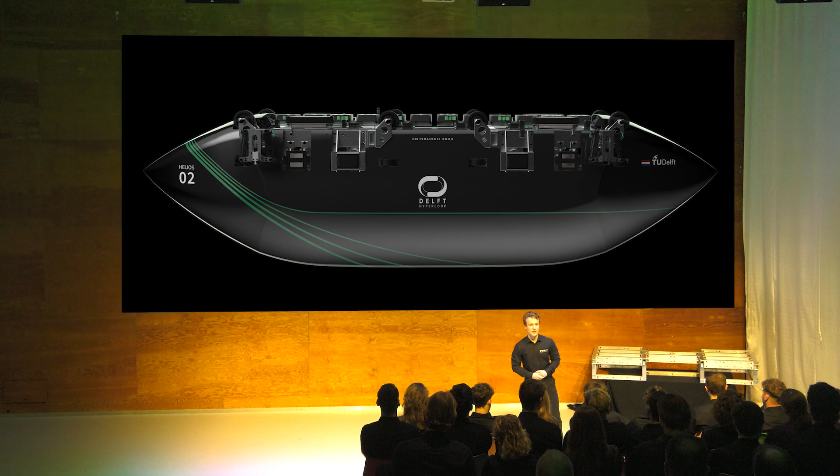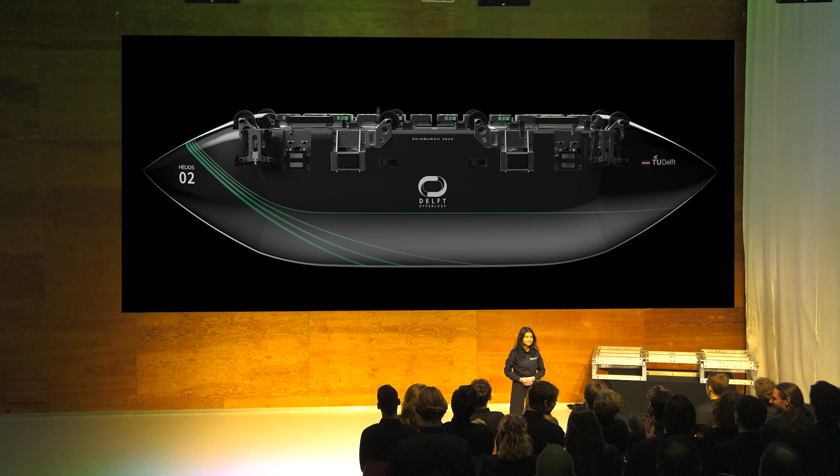Isn't it unbelievable what this team has already been able to accomplish in under 6 months? This year, we aim to design, build, and demonstrate the best Hyperloop pod a student team has ever developed. But we do not want to keep our story to ourselves. We want to reach a greater audience, to show them what a year at Delft Hyperloop really looks like, and to inspire them to accelerate together.

That is why we are making a documentary of our year, and that is also why you've been surrounded by so many cameras tonight. So, before you continue on to the drinks after this presentation, I would like to ask you to take a look at the flyer that was given to you, and see how you can support the realization of this documentary.

Tonight, we have shown you our final design. With this design, we are taking a major leap towards a scalable Hyperloop system. Helios II will be fully levitating, will be propelled by a new, never before performed and highly energy efficient motor. And it will be doing all of this while being fully vacuum compatible. With this design, we are one step closer to our journey to the European Hyperloop Week of 2023.